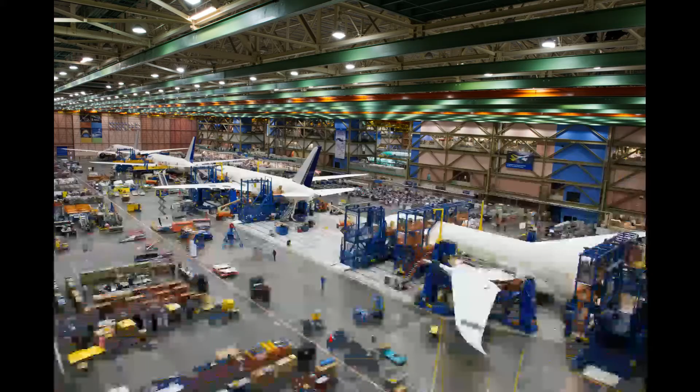There have been some developments in the aviation sector to address the issue of climate change. Airline and aerospace companies have been experimenting with a variety of sustainable aviation fuels to reduce their carbon footprint. We will look into the two main sustainable aviation fuels currently in development, and I will give my opinion on what is likely to be the best way forward.

Before we talk about sustainable aviation fuels, we should discuss the current fuel source they will be going up against. Most commercial aircraft operate by burning a hydrocarbon known as kerosene. Kerosene is produced from crude oil and has three key properties that make it the preferred option for airlines, that being energy density, cost, and density. Potential sustainable aviation fuel sources must have comparable properties in order for them to compete against kerosene.

The first sustainable aviation option we will discuss are biofuels. Biofuels are similar to fossil fuels like gasoline and kerosene in properties and performance, except that they can be produced from renewable resources, such as animal feedstock.

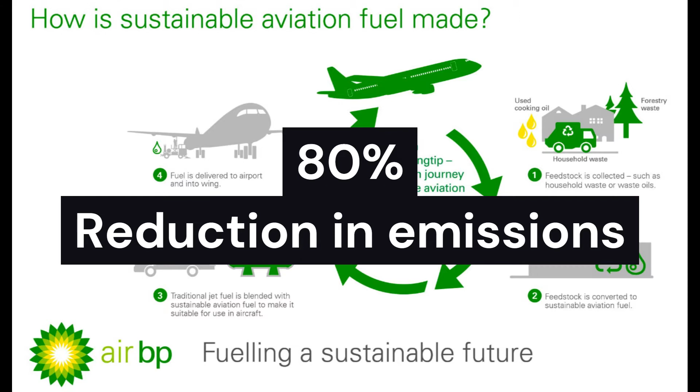Biofuels are expected to reduce carbon emissions from aircraft by 80% because they can be recycled in the carbon cycle and burn more cleanly when compared to kerosene.

Biofuels are also known as drop-in ready fuel sources because they can be used in traditional aircraft with little modification. This is important because fuel sources that can work in existing aircraft will save companies money because they do not need to spend extra money on renovations and new aircraft.

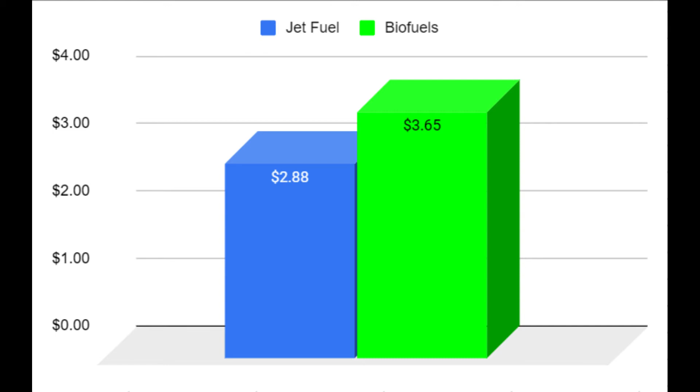Biofuels have also been found to be cost competitive to kerosene. A study conducted in Queensland, Australia found that biofuels could fulfill the regional aviation demand, with fuel costs ranging from $3 to $4 per gallon.

While these statistics are impressive, biofuels have seen some pushback by environmentalists due to their significant carbon footprint. Biofuels are also problematic because they require large amounts of biomass, which comes mostly from the agriculture industry, which contributes to 11% of global emissions according to the EPA.

The second sustainable aviation fuel option to be considered is electric and hybrid electric powered aircraft. Electric aircraft use electricity stored in batteries as the sole power source. These batteries would drive electric motors to provide thrust to the aircraft.

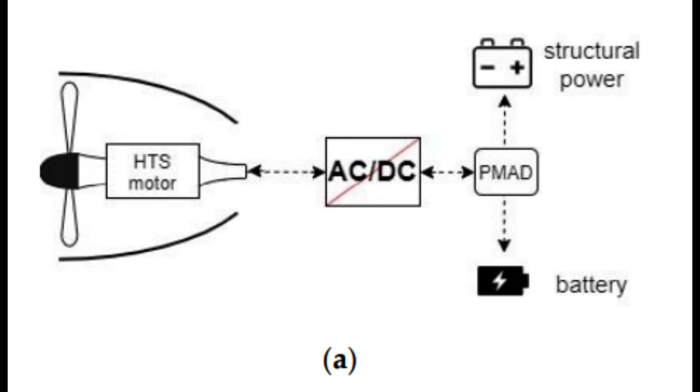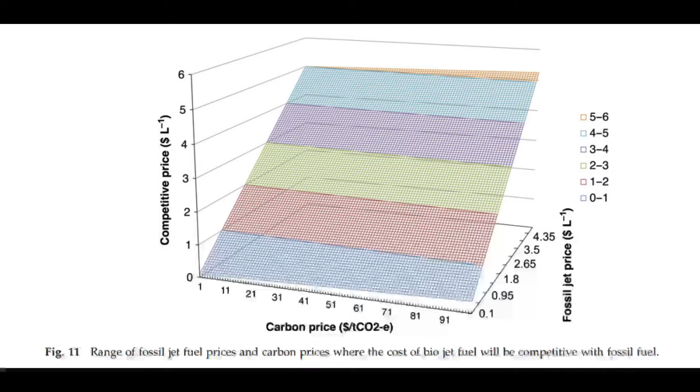Full electric aircraft are a promising option because they would cut carbon emissions down to zero since batteries and electric motors do not produce carbon dioxide. Not only will this improve the environment, it will also save money as countries such as Australia have passed carbon taxes on aircraft to reduce travel.

Researchers in London conducted a study on refitting an Airbus A320 with an all-electric propulsion system. In theory, an Airbus A320 traveling 900 miles could be powered with a battery pack. However, researchers found that there would not be enough space for both the batteries and their required electronics.

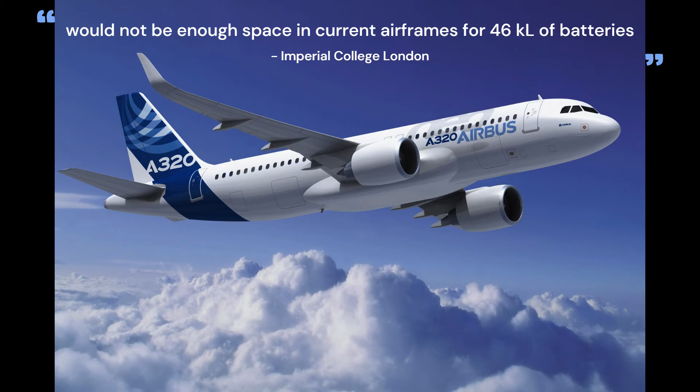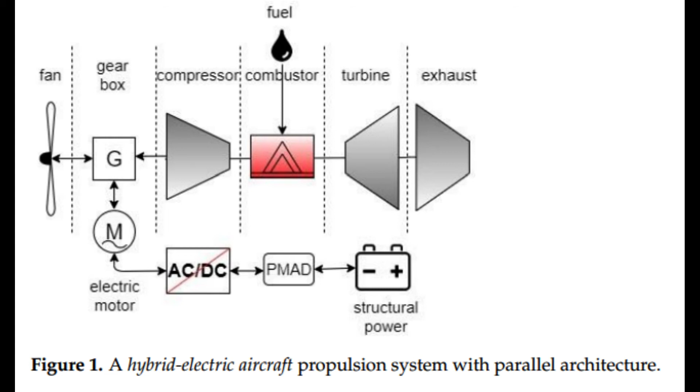A workaround to this problem is using a hybrid electric aircraft. Hybrid electric aircraft work using a combination of hydrocarbon fuel and electricity to power their engines.

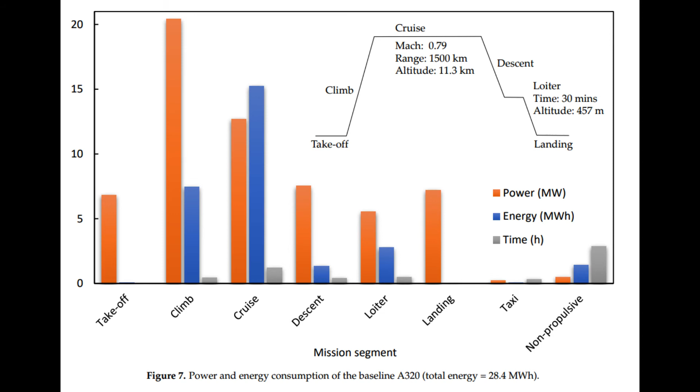The most energy-intensive phases of flight are climb, cruise, and descent. If these portions of flight were powered by batteries, an aircraft can increase its efficiency by 15% because less fuel is being burnt. By combining the best elements of electric and fossil fuel systems, hybrid electric aircraft could become viable.

However, they would still require extensive modifications to current aircraft, which would increase operating costs considerably because aircraft manufacturers would have to retrofit electric motors and batteries onto existing designs.

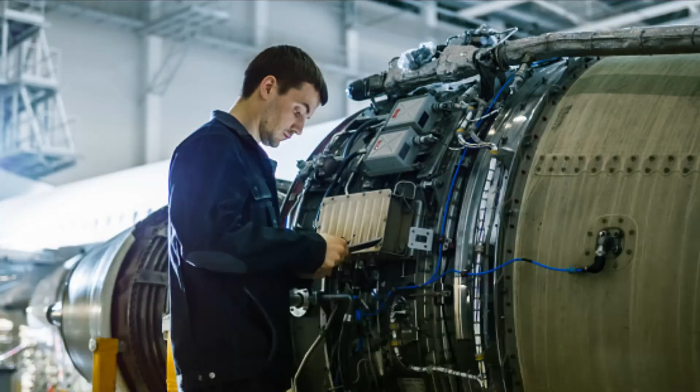Before giving my opinion, I want to give my credentials for talking about this topic. I am a graduating mechanical engineering student from Colorado State University with a concentration in aerospace engineering. Throughout my coursework, I worked on projects that involved designing a propulsion system using sustainable aviation fuel.

It's important to keep in mind that the common goal is to reduce the aviation industry's impact on climate change. The best way of doing this is to reduce the amount of carbon dioxide emissions by aircraft because airplanes are the main producers of CO2 in the industry.

Also, it is important to realize that the aviation industry has incredible demand, with the aviation industry transporting 4.3 billion people every year, and that number will likely continue to grow. Keeping costs low will be critical for millions of people who depend on cheap and fast air travel.

All that being said, I believe biofuels are currently the best option for the aviation industry right now. They can be quickly implemented into current generation aircraft at relatively low cost and would have an immediate effect on reducing carbon emissions. While biofuels would still produce a considerable amount of carbon, they still overall reduce carbon emissions without sacrificing flight range and cost.

With further development, a new generation of hybrid electric aircraft would replace biofuel aircraft, further reducing carbon emissions. Once batteries meet the design requirements for commercial aviation, hybrid electric aircraft would pass the torch onto electric aircraft, bringing the aviation industry's carbon emissions to zero.